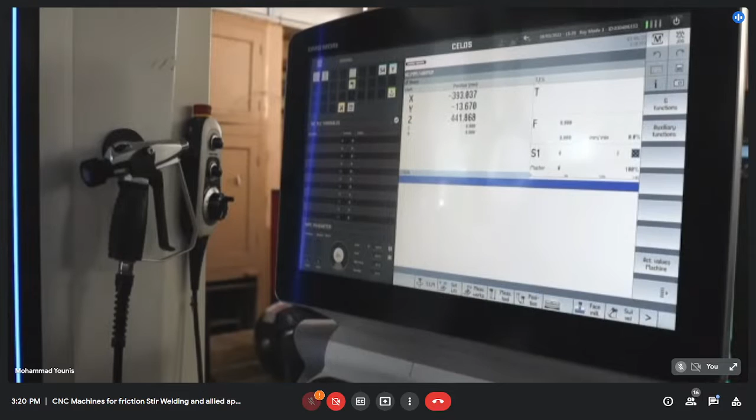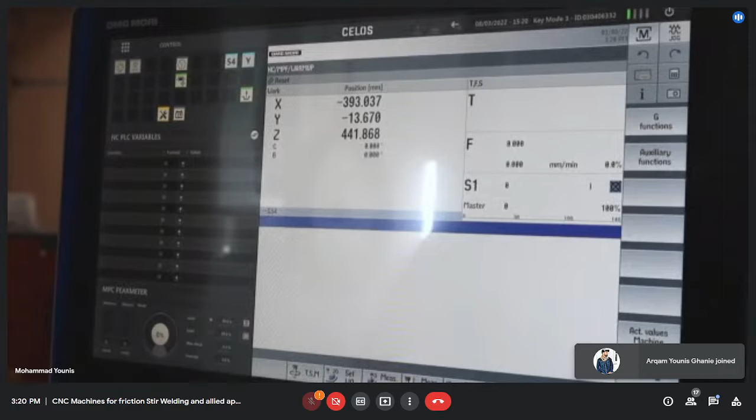So, we are about to start our today's session. Today, we'll be discussing the unloading and the loading of different types of tools, and also we'll repeat some portion of the measuring system that we discussed yesterday, called the Blum system. Then we are going to load the workpiece onto the table, onto the machine, and if that's done, then we'll move to another session.

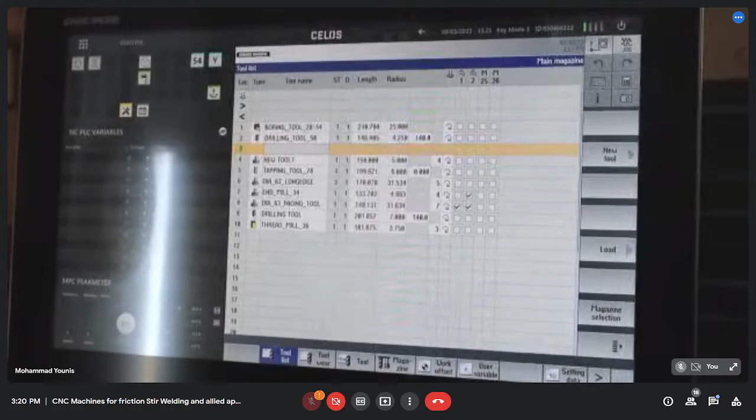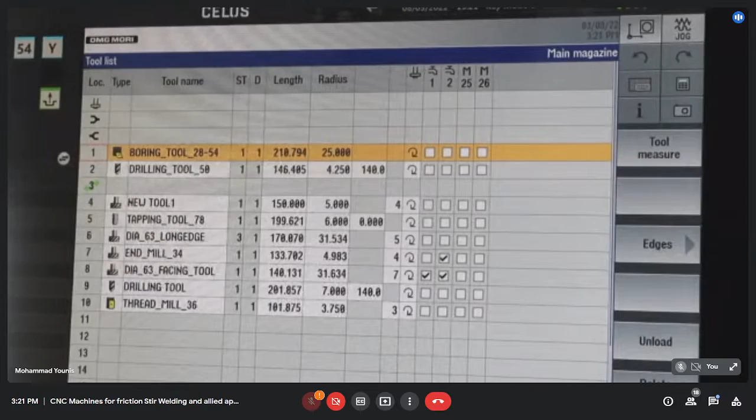So for now, here we have got different types of tools that are already loaded onto the tool magazine. The first column here tells us the location of the tool. Here we have the tool name. Then we have other parameters like the length and radius of the tools. At location number one, we have a boring tool having a length of 210.794 mm and a radius of 25 mm.

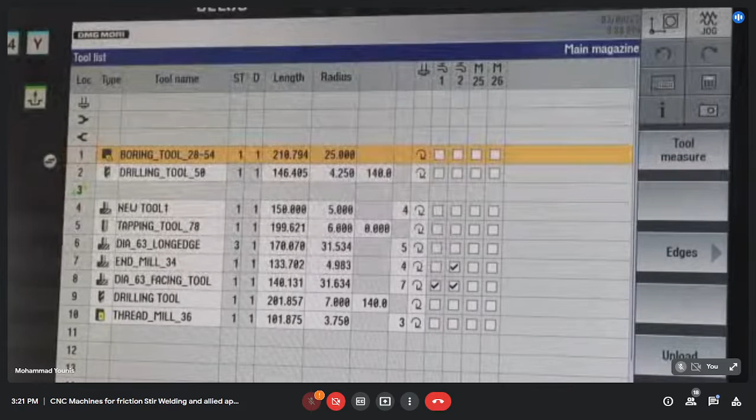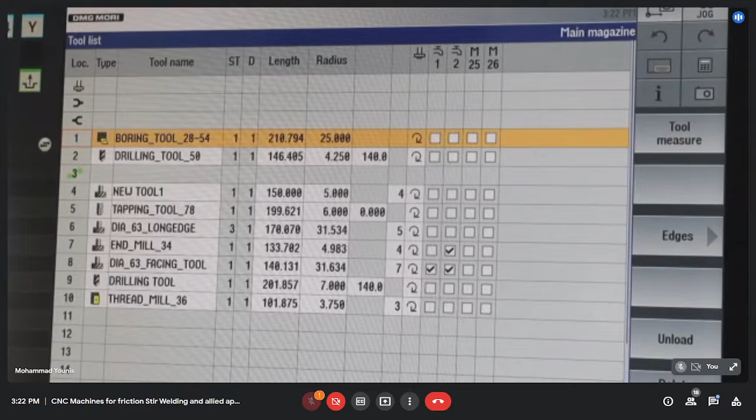So now we are going to unload some of the tools, and we'll load them again onto the machine, and we'll see how this process is done. Here we'll also see that a tool is actually an assembly of some parts, like the tool holder, the collet, and the cutting bit. So we will also disassemble some of the tools, assemble them, and see how that is done.

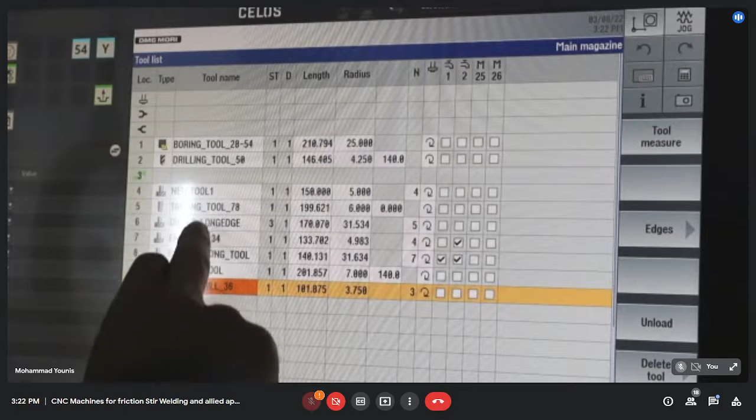So here I'm going to unload this end mill. Just a moment. So we are going to unload some of the tools. The first tool will be our drilling tool that I'm going to unload. It is at location number 2. So I simply select that tool and tap the unload icon here.

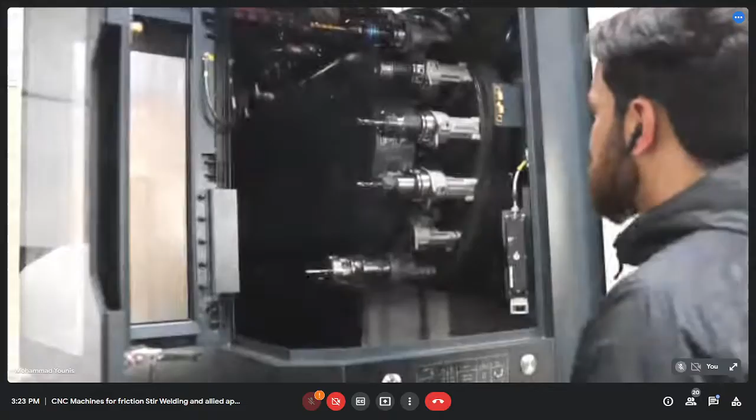Then here you can see a message that the magazine loading door is open. So we'll directly move to the tool magazine compartment. Here you can see this tool is at pocket 2. Also, you can see this arrow. It tells me that this tool is ready to unload. So I simply have to hold the tool and then press the unloading button here, the clamp. After pressing this button, I am able to unload this tool.

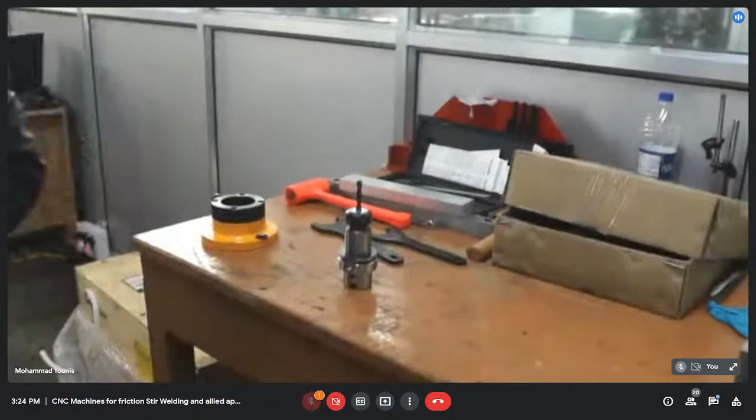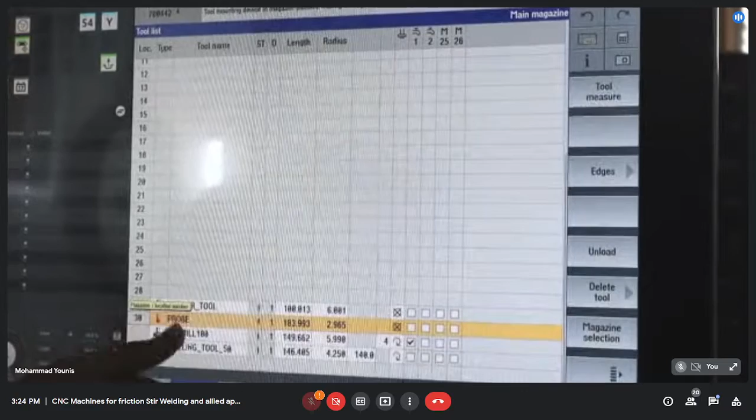So we'll be unloading some more tools. Again, if you can see here, there is no tool at pocket number 2 now, and the tool details are at the bottom. Here we have a serial number, the pocket number of 30, and you will find these details at the end of the locations that are present on the machine. So here you can see we have all the details of the drilling tool, but it is not loaded.

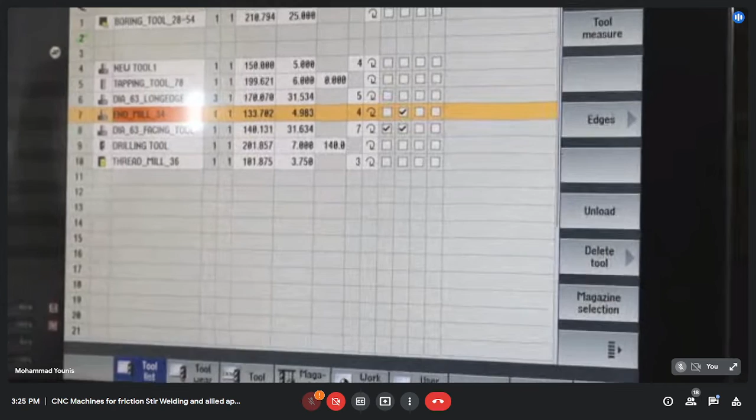Similarly, we are going to unload other tools, like the end mill. The tool name is end mill 34, having a length of 133.702 mm and a radius of 4.983. So we are also going to unload this tool. We will simply select it and, just a moment. Okay, actually, the door is open. That's why we got an error message here. Now we'll again select the tool and tap the unload icon, and the magazine loading door is open now.

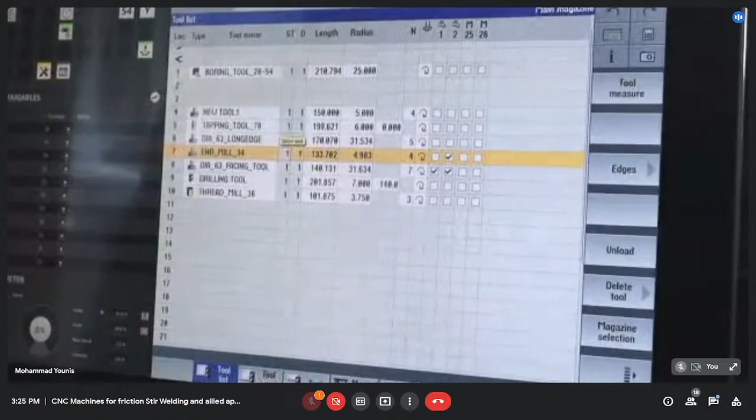So you can see here, this end mill that I have unloaded is at the location where we have this arrow mark, which means that this tool is ready to be unloaded. So I simply push the button, hold the tool and unclamp it. And here I'm supposed to press the button again to complete the process. Okay. So for now, we have one more tool that is unloaded. Similarly, we are going to unload one more tool, a different tool.

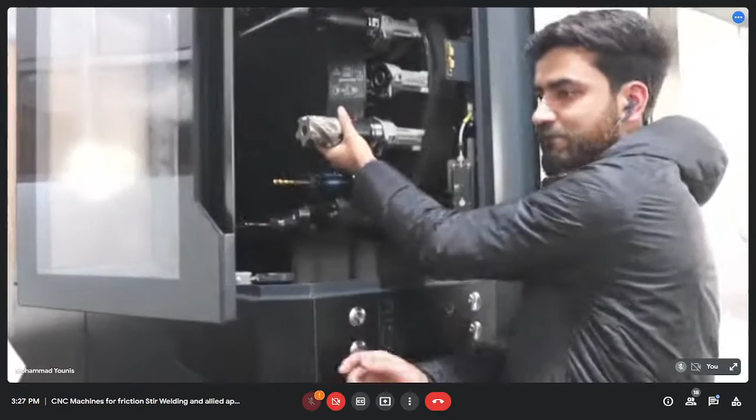So we are going to unload this facing tool. Actually, we are going to unload this long edge tool. That would be better, I think. So I'll simply select it, click the unload icon, and unload one more tool. Okay.

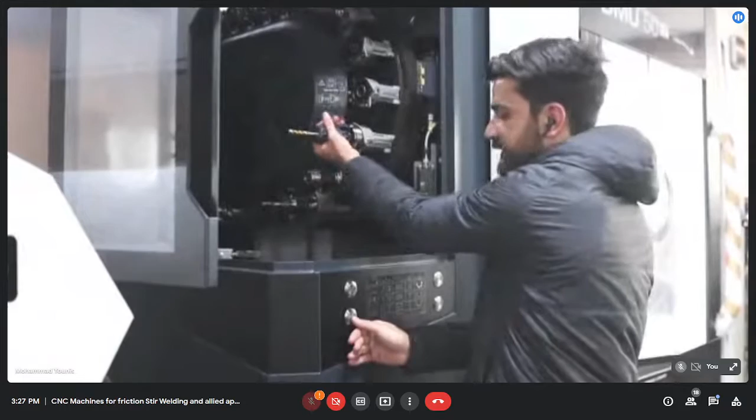We'll be unloading one more tool called the tapping tool. I'll simply select the tapping tool and click on unload. The door is open. I'll just press the button, hold the tool, and then close the window.

So we have got different types of tools here, as you can see. This is our milling, or I can say the side milling cutter. Actually, it is an inserted milling tool. Here we have inserts screwed on the periphery of the tool.

So this is a complete assembly actually. Once these inserts are worn out, we simply change them by unscrewing the screws that are assembled to this whole body. So simply

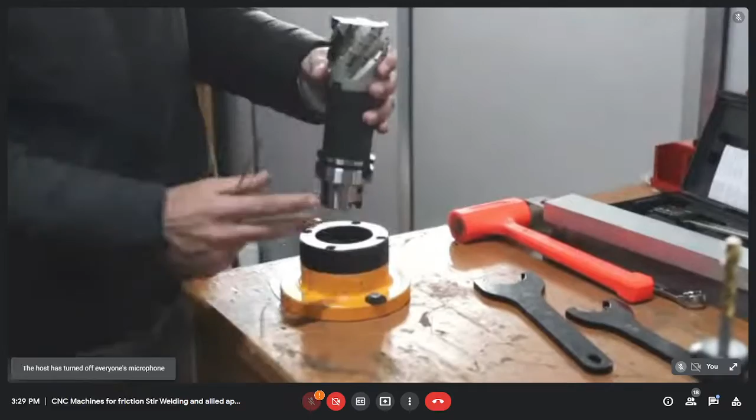You are not audible, sir.

Am I audible now, sir?

Yeah. Okay, fine. So once these inserts are worn out, we simply remove them by unscrewing the screws that hold these inserts on the whole body. So I'll just show you. I'll just unscrew one of the inserts so that you will get an idea.

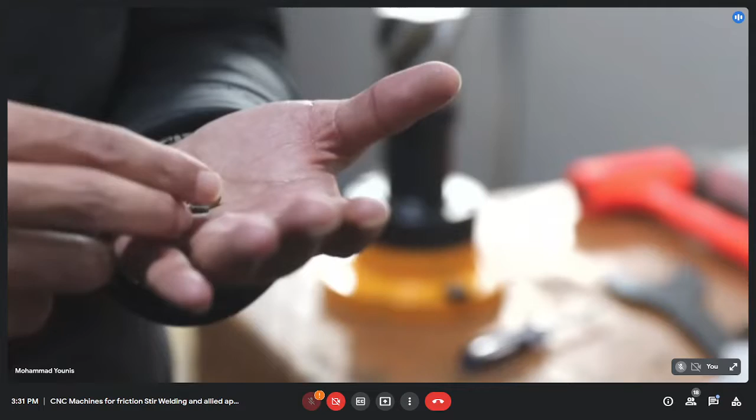Okay. So here you can see this is the insert. It is a carbide insert that is mounted on the whole body. So we actually hold these inserts with the help of screws. You can also see the screw here. So these are mounted on the periphery of the holder.

So here, once these inserts are worn out, if you can see, we have got two cutting edges here on the opposite sides. Once this edge is worn out, we can use the other edge on the other side. So simply we unscrew and then we mount it again onto the body, onto the holder.

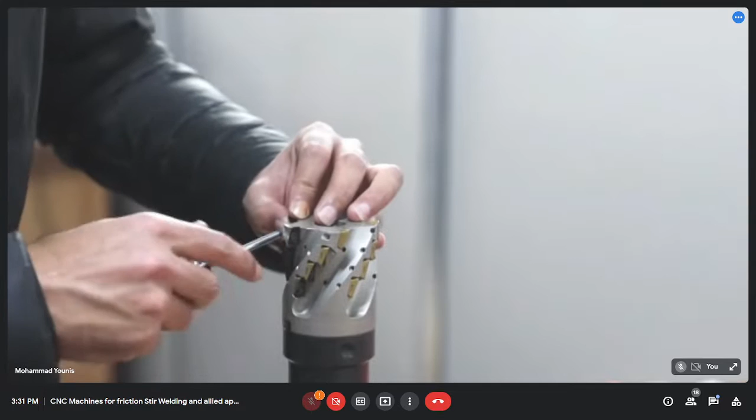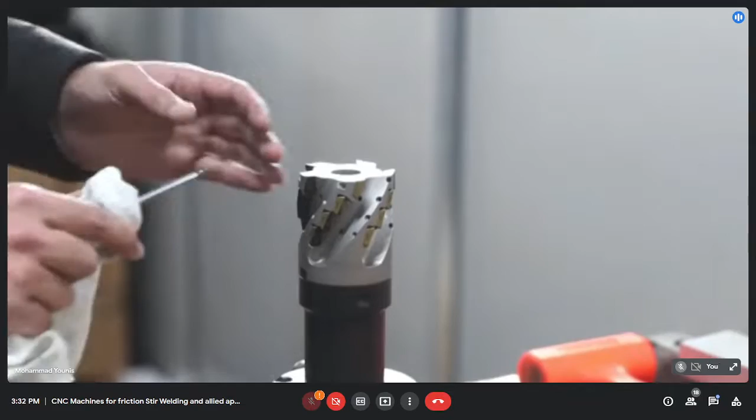So here the design of the holder is such that the insert gets aligned, I can say, automatically, because the design is like that. So I just have to screw it tightly. Okay, that's enough. So this is a milling cutter. This is one of the tools that is available with us.

So we simply change the inserts here. Then we have different types of tools that have got different mechanisms, different holding mechanisms, I can say. So here you can see this is a tapping tool. So we use this tool if we want to make threads. So this is a tapping tool. We use it to make threads, to perform threading operation.

Then we have this, a drilling tool. So this is used to perform a drilling operation. If we want to make holes on our workpiece, then we'll use this drilling tool. And we have one more tool here called the end milling tool.

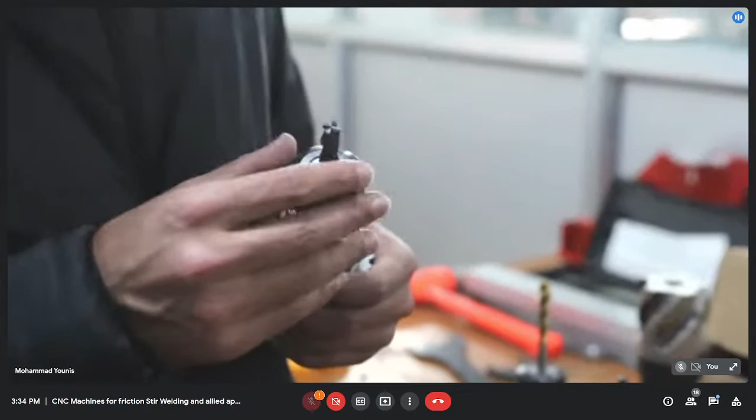Actually, we have got cutting edges here at the end as well as on the periphery of the tool. Like in the case of this inserted tool, this cutter, it can only cut at the periphery. So there will be no cutting at the end. But here, if you can see, we have also got some cutting edge at the end, and we have got cutting edge at the periphery also.

What is periphery, sir? The outer boundary of the tool, the outer diameter. That is the periphery. Okay, thank you.

It's not a continuous periphery. We have got here some number of edges. So we have got actually four edges here. On the periphery, we have got one, two, three, four. So we have got four edges here. It can be different for different tools.

It is actually tightened enough, so I'm not able to unscrew it. So I'll be getting another tool. Just hold a second.

So this is also an end mill tool, an end mill cutter of different diameter. This has also got four flutes, four cutting edges. So this is also an end mill tool, cutting at the end and at the periphery. But this is of different diameter. So I'll be loading this onto the tool holder.

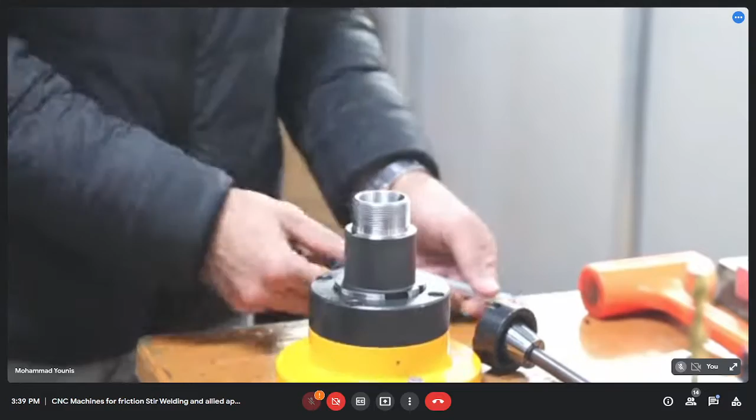So now you can see here the different parts of a complete tool. So here we have got this holder. This is one of the parts. Then we have another part. This is called the collet. Then we have a locking part, I can call it a nut, and this is actually the tool that is held through this assembly. So this is an end mill that is held by this assembly.

So here first we'll have a look at this tool. So we have some parameters, like here we have got four cutting edges. This is an end mill, so it can cut at the periphery as well as at the end.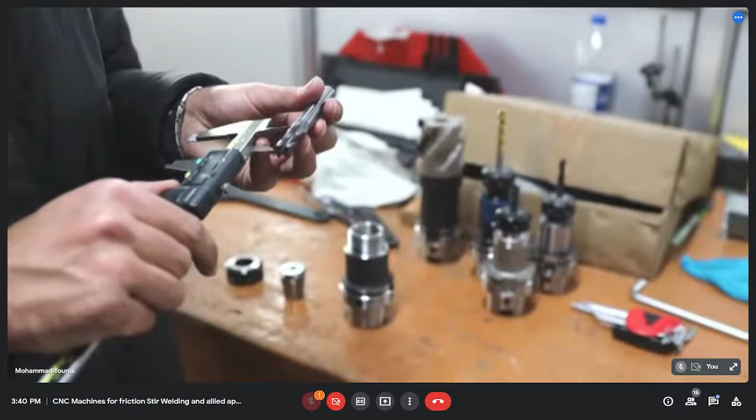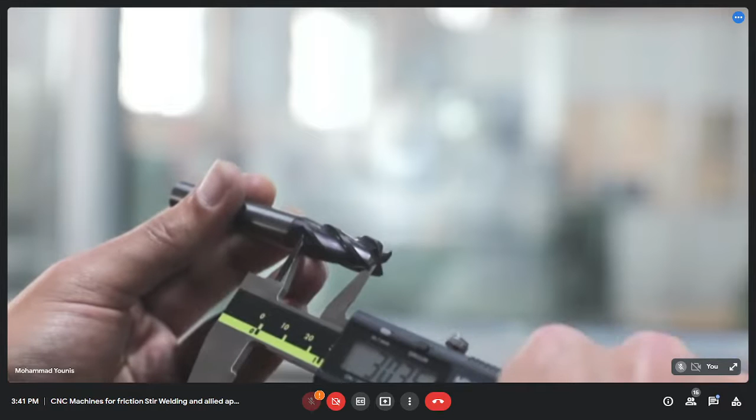So here, this is the cutting length actually, the total cutting length. So I can go up to, I can say this is 30 mm, 30.33, approximately 30 mm. So I can go this much deep into the workpiece to perform a cutting operation. So this is the cutting length for this end mill.

So I can say, if I want to machine a component or workpiece, I can go a maximum of 30 mm deep. That will be the maximum limit I can go to perform the cutting operation. So that is called the outside length or the cutting length of a particular tool. And this part is called the shank of the tool that we are using. So this part will be the shank, this part will be the cutting length.

So after that we have this holder. So these holders come with codings. So here we have, this is ER32 type of holder. We also have got ER25 holder. Here we have used ER25 holder. So it depends on the diameter of the collet as well as on the diameter of the tool that I am going to mount. So this is ER32 type of holder. So here you can also see this is a collet.

So collet is selected on the basis of the shank dia. So we'll measure the dia here. So it's around 12. So the shank dia is 12. So I'm supposed to select the collet as per the shank dia. So here also you can see this collet can hold a tool having diameter of 11 to 12 mm.

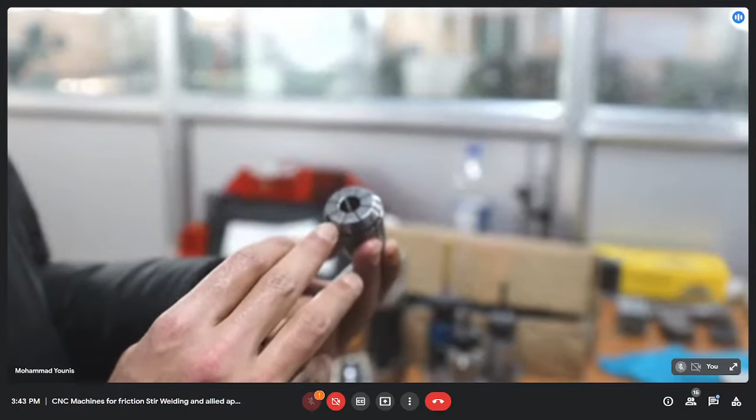So on the basis of the shank dia we have selected this collet, and it's also written there that this collet is for ER32 type of holder. So it can hold a tool having a diameter from 11 mm to 12 mm. But we prefer to hold a tool of the higher side, that is 12 mm of dia.

Then we simply have this nut that is used to complete the assembly, to hold the collet as well as to hold the complete assembly. We can call it a nut. So it actually holds the collet, and I can say it actually completes the whole assembly.

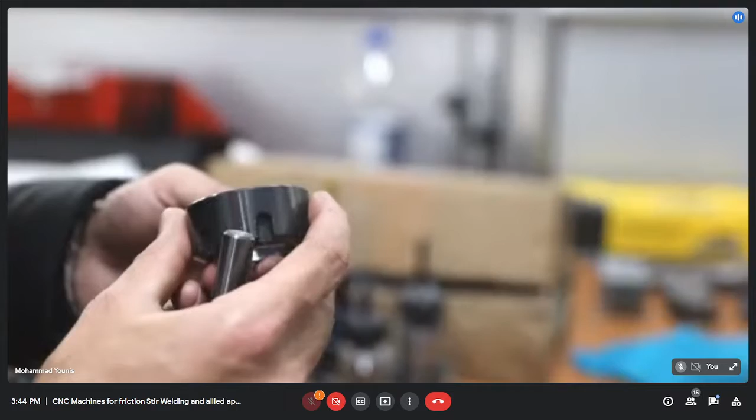So now we'll be assembling it again. Simply I'm holding the holder on the tool body. Then we insert this collet onto this nut. Okay, it should be flat. You can see here it should be flat. There should be no angle or taper, I can say. It should be flat. Then we'll be inserting this tool from the front side,

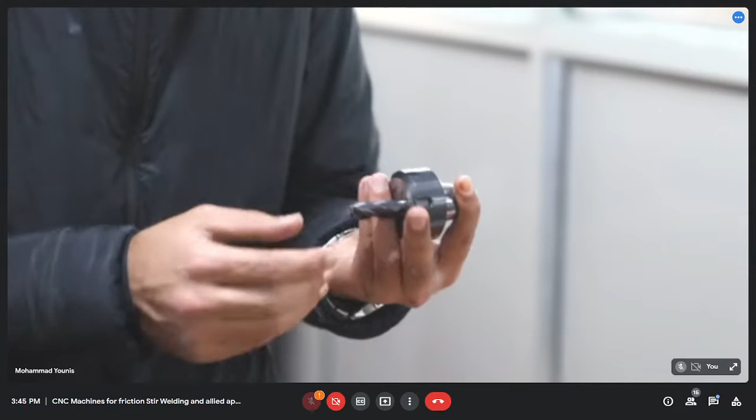and there is some extra length, that much of length is the cutting length, and we have also got some more length that I need to keep out of the collet surface. Then we are simply going to mount it here, holding this tool.

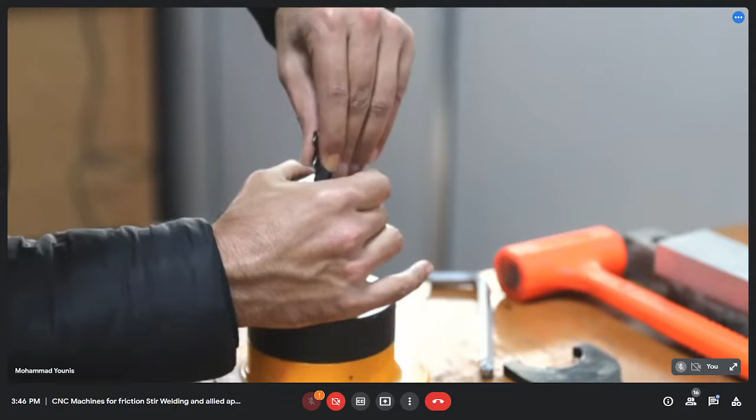Okay, with the help of a spanner. It is also written on the spanner that it is to be used for the type of holder. So we tighten it enough so that there will be no slipping of the tool. Okay, I think that much is enough. So now this is the complete assembly, the complete tool ready for machining.

So all other tools like this end mill, here we only have a different diameter, the lower diameter. I'll check it. Yeah, this is 8.5 mm diameter end mill, and this is 12 mm diameter end mill. Then this is a tapping tool. It is an M12 tapping tool, M12 tap mounted on the collet.

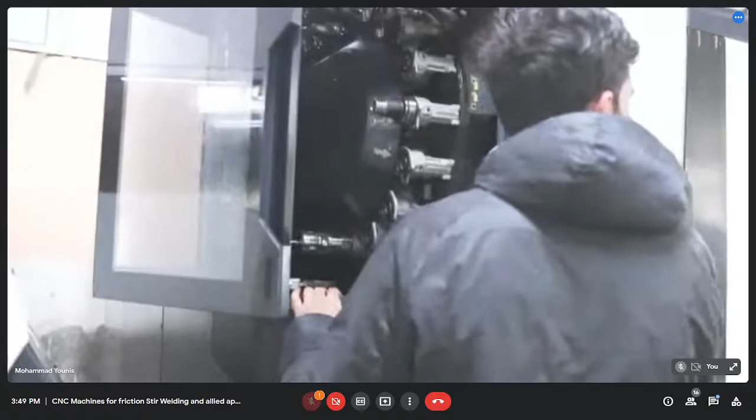So what we are going to do now, we'll be loading these tools again onto the machine, and we'll see how to load these tools with the complete data. So first, I'm going to load this end mill. So I'm going to the tool screen. So here you can see we are having tools at pocket number 1, 4, 8, 9.

The screen went completely blue. It got blanked out. Am I visible now, sir? Okay, fine.

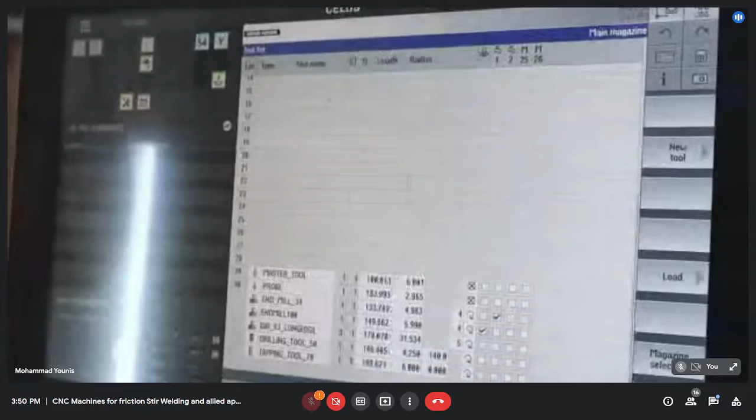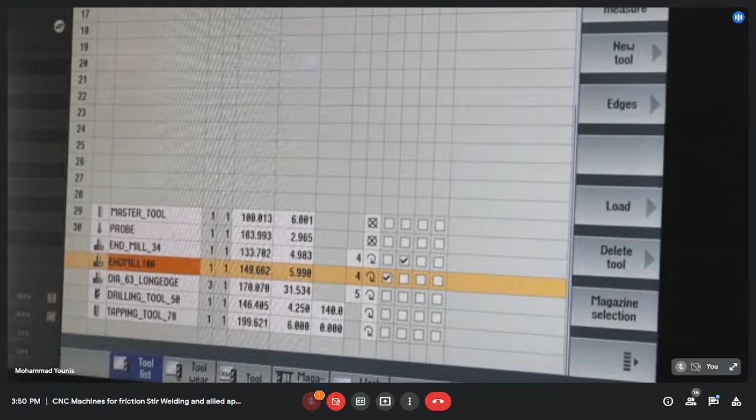So we are also having tools at pocket number 29 and 30. So now we are going to load this end mill. 100 is the tool name, and this is the length here, and also the radius is 5.99. So I'm going to load it. I am supposed to write these details actually,

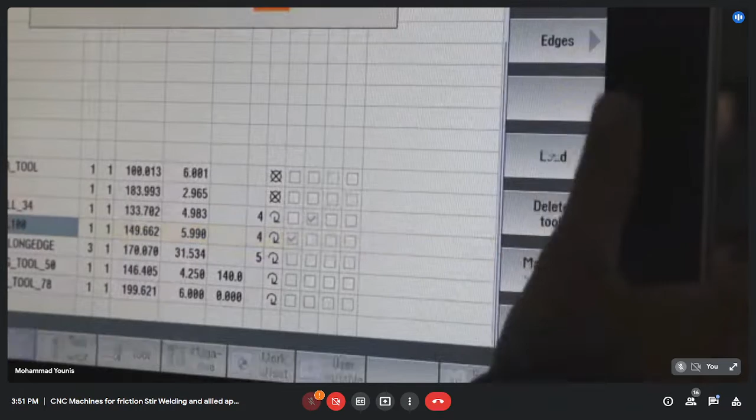if I'm loading a completely new tool, but these are already loaded onto the machine, so we'll just select them to save our time. So I am selecting this tool and then selecting this row, then tapping on the load icon. So it tells me here that location number 2 is available for this tool to be loaded. I can change this location also, but by default it is providing location number 2. So I'm going to load it at location number 2. I'll just bring the tool, just a minute.

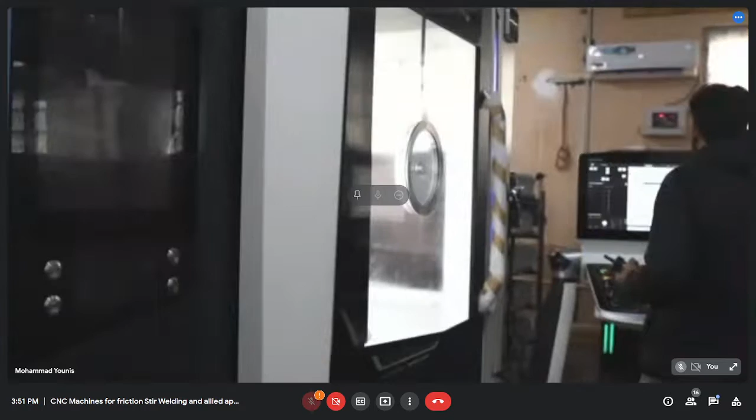Okay, I was supposed to click the OK, open the door, and here you can see we have pocket number 2 right at the arrow. So I can hold this tool like this. Okay, then push the button again. Okay, and check it rigidly whether it's tightly loaded onto the pocket. So I'll just close the door.

So here you can see we have loaded end mill 100 at pocket number 2, having length of 149 and radius of 5.99. So in the similar way, we are going to load other tools.

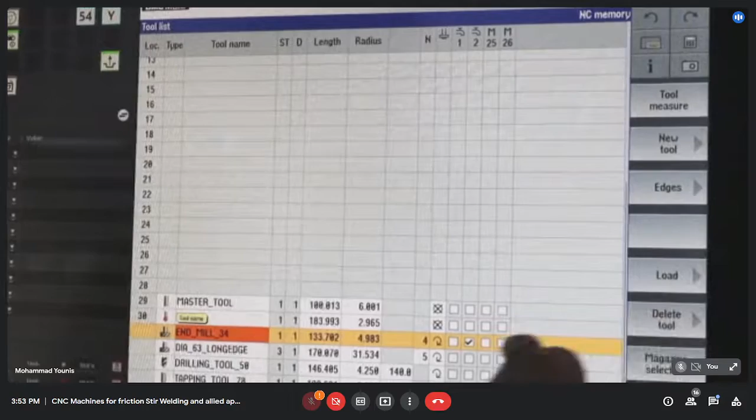Now we are going to load end mill 34. I'll just select it, click the load icon, press OK. It shows me here that pocket number 3 is available. Okay, I'll just click OK. Again, we have to push the button first. Again, the screen got blanked out.

Yeah, the screen is back. Dean? Am I visible and audible now? Yeah, sir, both. Yeah, fine. Sorry for the inconvenience, sir.

Yeah. So this is the tool, end mill 34. So here I need to take care. The machine doesn't know whether it is an end mill tool or not. So I need to make sure that I have got the right tool to load on that position, because once the tool gets loaded, and I have kept its name as end mill, the machine will take it as end mill. So I need to be careful while I'm loading these tools.

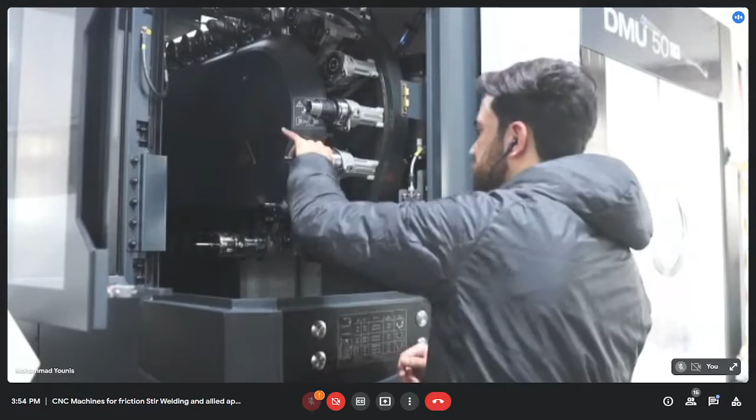So I'm loading it here, just clicking, pressing the button, checking it, closing the door. So again you can see here that the end mill 34 is loaded at pocket number 3. Okay. Likewise, we have got 3 more tools. I'll make it a bit fast.

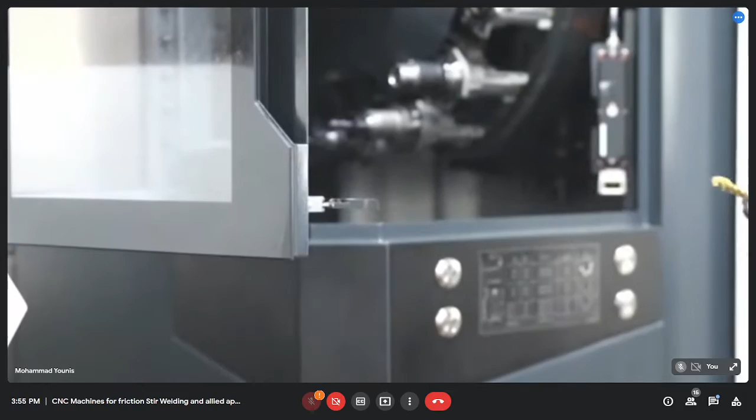So I'm going to load the tapping tool. Just click the load icon, click OK. So location number 5 is available. Then I'll just open the window, push the button here. That is actually the hydraulic clamp. And there is also a mark on the holder that tells me that this mark should be at the bottom side.

So keeping that mark on the bottom side, inserting it onto the pocket, pressing the button again and checking it, closing the door. And now here pocket number 5 is showing the tapping tool with other specifications as well.

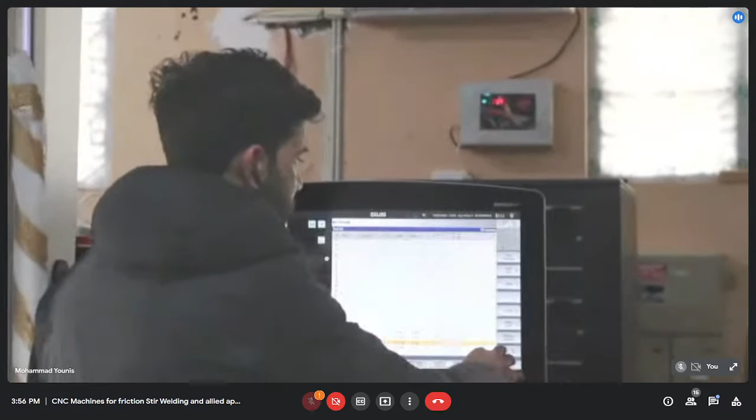Now I'm going to load the long edge tool, the inserted tool, just clicking OK here, and location number 6 is available. Closing the door.

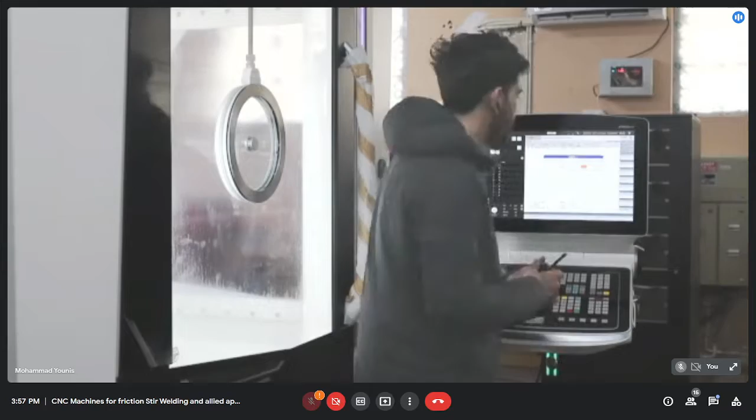So I'll load one more tool, a drilling tool. So I'll select it, click on load, OK. So location number 7 is available for this tool by default. Oh, sorry. Checking it. So here also you can see that pocket number 7 was assigned, and I can cross check it here that yeah, this is pocket number 7.

So I am loading into the right pocket, and I have to make sure the tool I am loading is the right tool that I have selected. So I have selected a drilling tool. So yeah, this is a drilling tool loaded at pocket number 7. Okay. So this was about loading and unloading of different types of tools.

First, we'll have a look here. Yeah, we have end mill 100 at pocket number 2 and end mill 34. These are the two names by which we call these tools into the program. But I have to be sure whether the tools which I have mentioned in the program are the right tools.

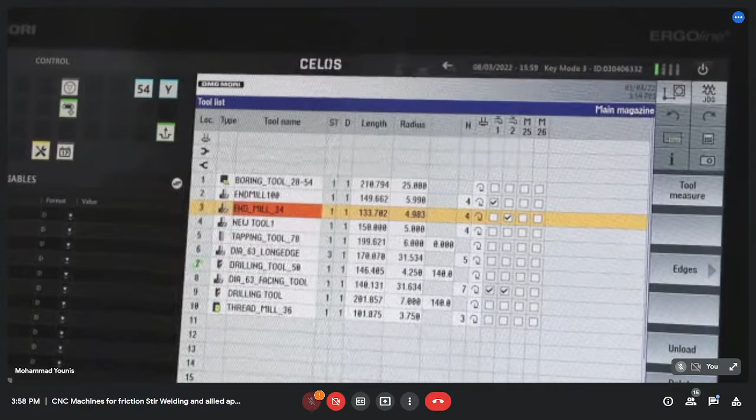Say for example, if I'm calling end mill 100, here the radius is 5.99, approximately 6 mm, and the diameter will be 12 mm. So I need to be sure whether I'm calling the right tool while performing some operation. So here we have loaded all the tools. We have tapping tool at pocket number 5, long edge milling cutter at pocket number 6, drilling tool at pocket number 7, and we have also got some other tools here.

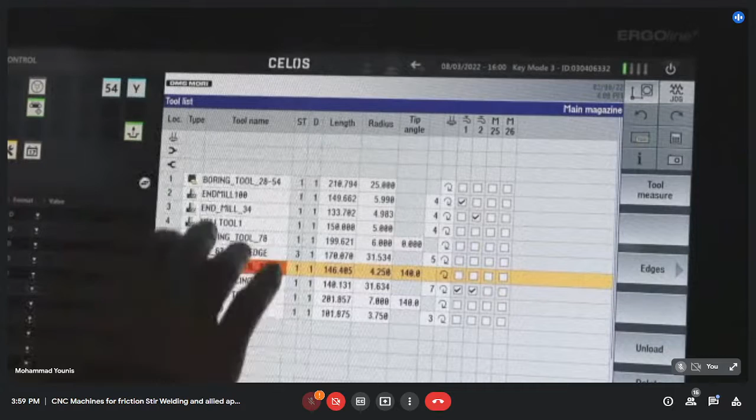What we can do now, we can assign these pocket numbers permanently to these tools. Say for example, I have an end mill at pocket number 2; I can permanently assign this pocket to this particular tool. Otherwise, once I call the tool and complete some machining operation, if it is not a permanent pocket for that tool, it can go to some other pocket. Say for example, it can be loaded at pocket number 12.

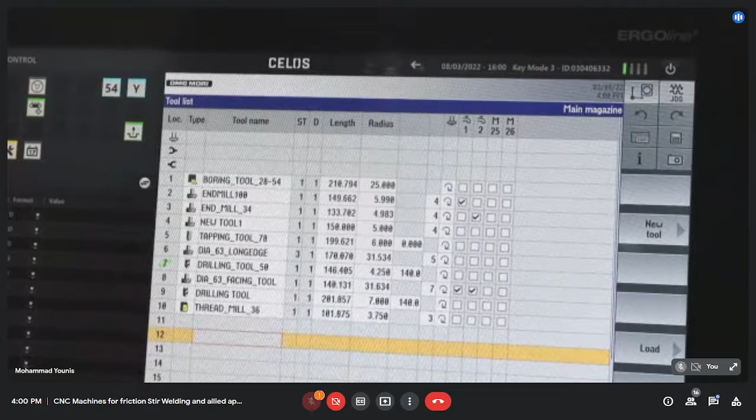So if I'm not making it a fixed pocket, then there will be random locations for these tools. Okay, but if I have to make it a fixed pocket for a particular tool, then what am I going to do?

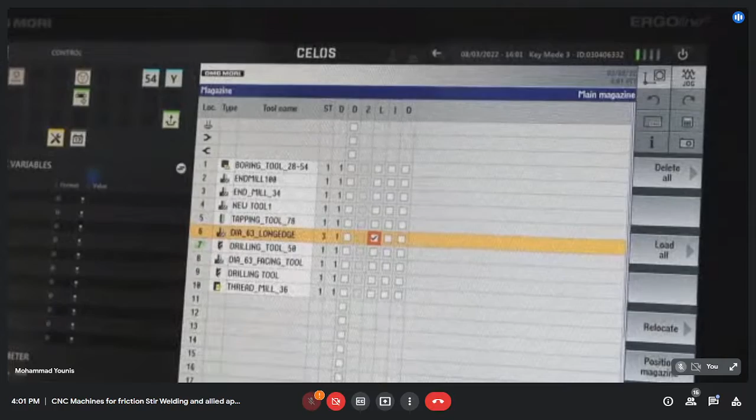Okay, so here I simply get the option in the tool magazine icon that if I want to permanently assign this pocket number 6 to the long edge milling cutter, then I simply have to mark it. So it tells me that the tool is on a fixed location. So once I use this tool to carry out some operation, then this tool will be loaded back into the same pocket number 6, if I am marking it here as a fixed pocket.

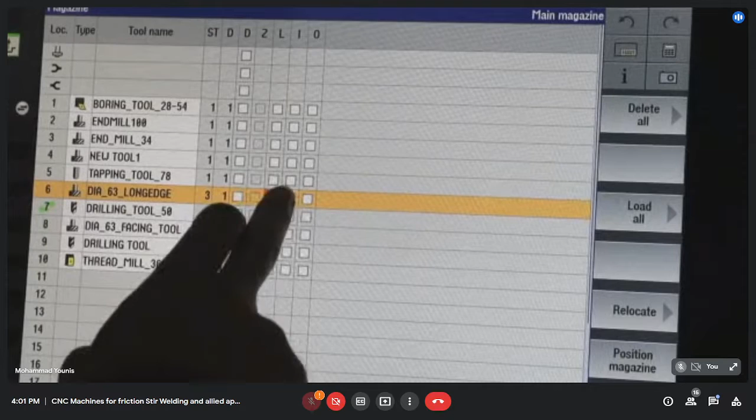So if I am not doing it, then this tool can go to any pocket out of 30 pockets. It can be anywhere. Okay. So for now, I'm making this long edge. Actually, this is to be done for tools having larger diameter. So at that time, we want the fixed pockets.

Likewise, you also can see we have two tools here at pocket number 29 and 30. So these are actually the fixed pockets assigned to these tools, because we are not going to use these two tools for any cutting operation. That's why we kept them separately in fixed pockets. So that's why they are marked here as fixed pockets.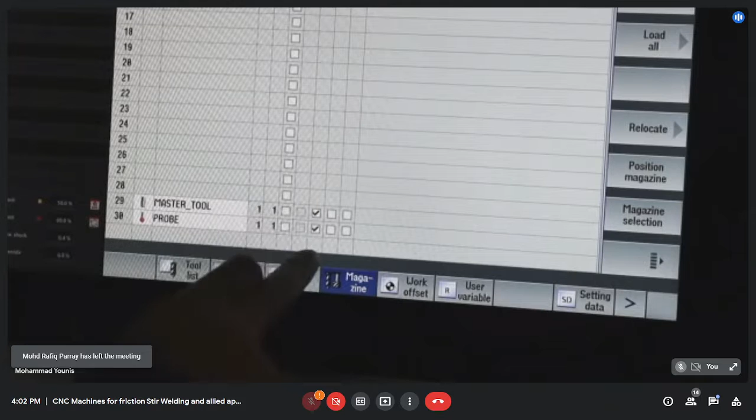So we will also have a look at these tools once we perform this work of setting. So these are at fixed pockets. So once the probe which I'm going to use to take the work offset is called, then it will again move back to that particular fixed pocket. Okay. So this was about loading and unloading of the tools.

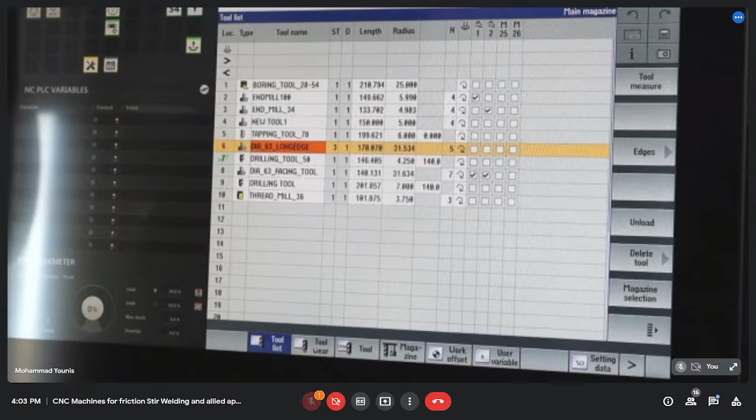So now another topic will be on the loading of the workpiece onto the machine, onto the work table. So yeah, we'll be doing it now, I think. So for now, I'll first show you different types of clamps, the clamping devices actually that are used to mount the workpieces onto the work table. Just give me a minute.

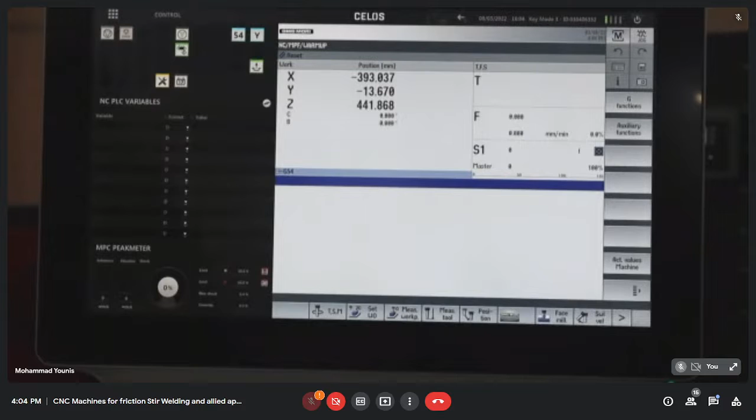Okay, we'll have a look at some of the clamping systems by which we clamp our workpiece on the work table. So here, this is a work table which has got some T slots here. 7 T slots are present on this work table. So what we have done here, we have held this vise. This is called a vise, having one fixed jaw and one movable jaw.

So what we do, we first clamp this vise onto the work table. Then we use this vise to hold our workpiece. So this vise is used to hold flat workpieces. In general, we can have flat workpieces or cylindrical workpieces. But this vise is used to hold flat workpieces. So to hold cylindrical workpieces, we have different types of vises in which we have more than 2 jaws. So this vise is clamped on the work table with the help of these clamps.

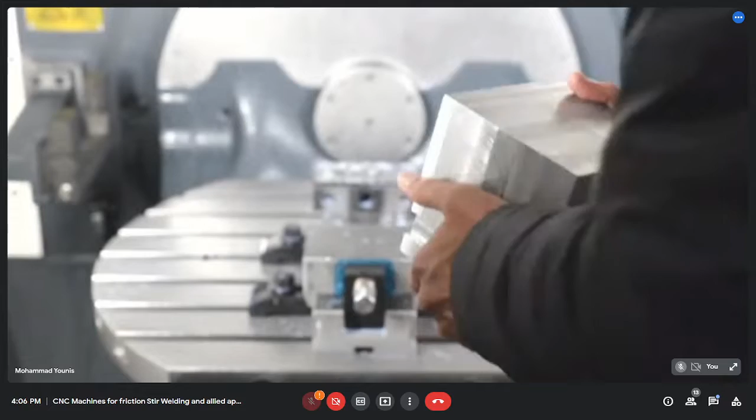Okay, so there are 4 clamps. One, two, three, four. So I'll just give you the idea. So we are going to hold this workpiece. So this is the workpiece. It's a bit heavy. So in the coming sessions, we're going to machine this workpiece. So this is a flat workpiece. You can see the sides are flat here. So to hold a workpiece on this type of vise, we need to have two flat sides. So here every side is a flat side. So we can mount it in any position actually.

So here what I'm doing, I'm simply putting this workpiece between the jaws of the vise. Okay. Then this one is a movable jaw, and this movable jaw can be adjusted as per the dimensions of the workpiece. Then, okay, I'll tighten the jaw with the help of a spanner, and make sure it is tightened enough so that it may not slip out of the jaw. Okay, so

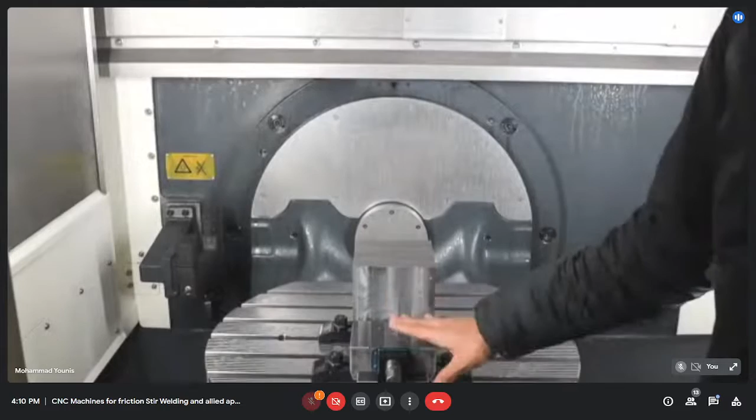So here, for 3-axis machining, the clamping is rigid enough like this. But if I have to perform 5-axis machining, this type of clamping is not rigid enough, because I'm going to rotate it, and the weight of the workpiece is significant since the height and dimensions are more.

So there are chances, if I rotate this to some angle, say 45 degrees, it may slip, because there are also cutting forces acting on the workpiece. So there are chances that this workpiece will get slipped.

So for that reason, I need a more rigid clamping system. So for that reason, what I have done is I made two slots here. This is slot one, and another slot is on the opposite side of the workpiece. So we've got two slots here. So what I am going to do is directly clamp this workpiece onto the work table.

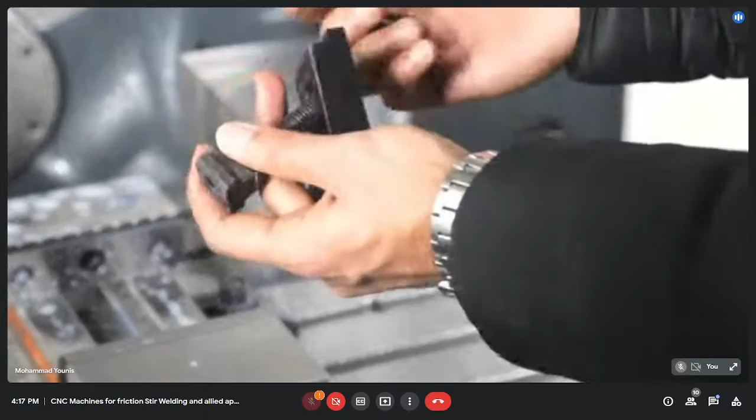Just simply, we are removing these clamps from the side. And I'm also going to show you the clamp that we are using to mount this vice onto the work table. So simply here we have got one nut, and this is a T type of nut that is used at the bottom side.

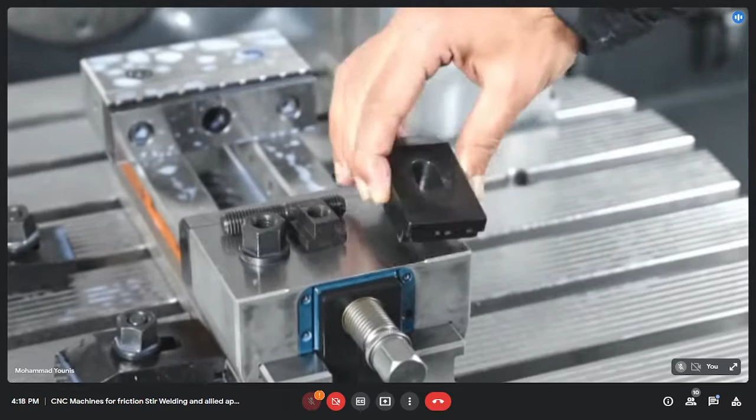This cross section is also of the T shape. You can see here because I have got T slots, so this will help keep it mounted on the work table, because it simply gets fixed within the T slots. Then I have one bolt here, and that is the clamp that I'm going to use to clamp our workpiece. So this is the complete assembly.

So this is the vice actually, that is the complete assembly. So we have got here two jaws, that is the fixed jaw, that is the movable jaw, and we can also adjust this movable jaw to some location. For that, we have got some holes here.

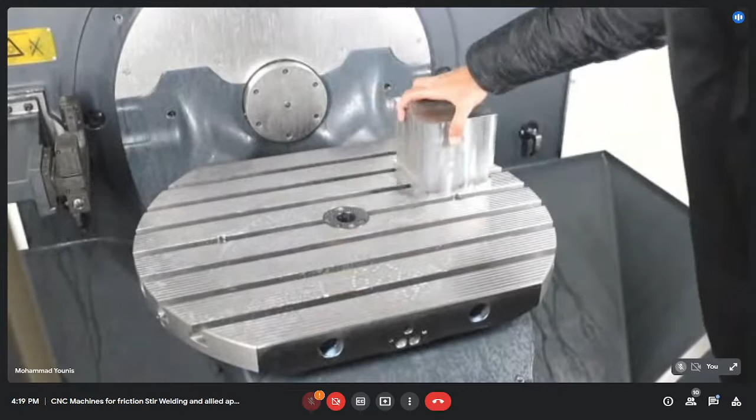So I will be removing this vise from the table, and actually this is our work table. Here we have got some chips. So this is the actual shape of the work table. Now I'm going to clamp this workpiece directly onto the table with the help of these clamps.